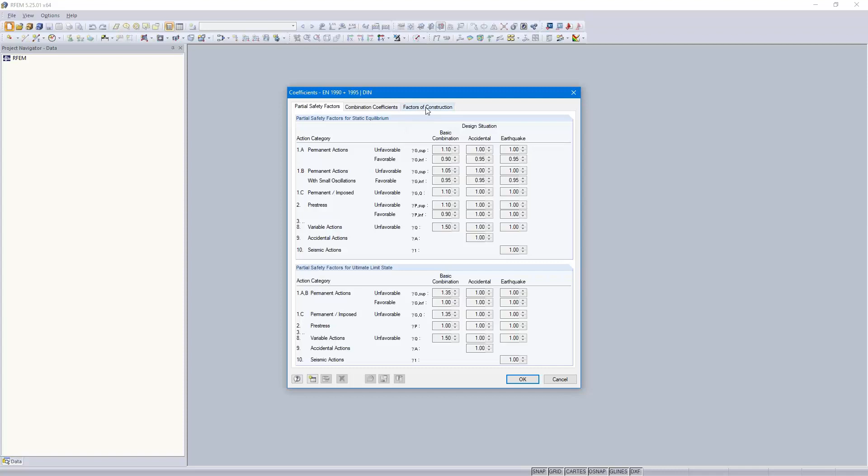Okay, then the national annex is here. I use the German standard, and I edited the settings of the national annex. It's a little bit hidden, but it's important for the combinations. Here you can choose the factors of construction, especially the KDEF factor.

And here with the button, the dialog opens, and I can choose service class 1 because our building is enclosed on all sides, and it's a heated building. The KDEF factor has been changed to 0.6 now.

Okay, that's all for this dialog.

So I changed the work plane to XZ here above, and the view in reverse Y direction. So I start with the first column here left above with a new single member, a beam, but I need to choose a cross section.

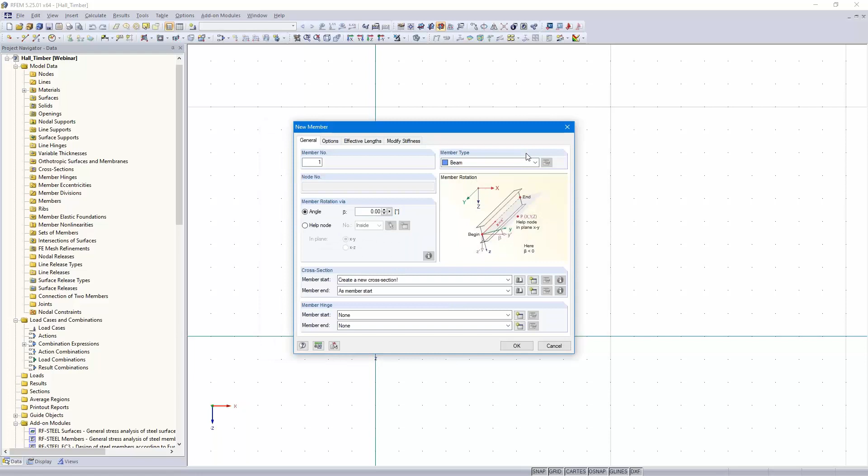I open the cross section library and choose a timber cross section. Dimensions are 160 by 700 millimeters. For the material, there's none assigned yet, so I open the library: timber, glulam, and I use DIN, glulam timber GL28C.

Okay, so that's all. Now I can enter the column. The height should be 5 meters, and I also model the beam, or the half of the beam.

So then I double click on the beam and add a member hinge at the start, a hinge around the Y and Z axis.

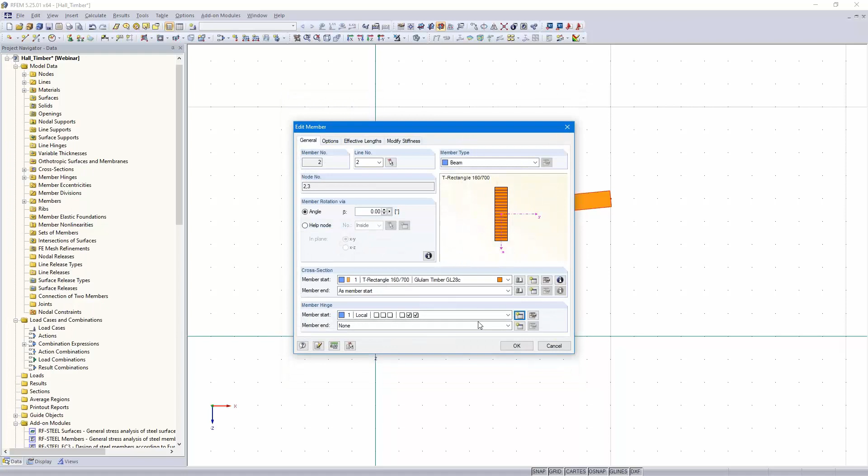And now I divide the beam in the middle, because later we will support the beam here at the edge, in the middle, and in the middle of the half of the beam. So I open the dialog with a right click, divide member and intermediate nodes, one node, and now it's divided exactly in the middle.

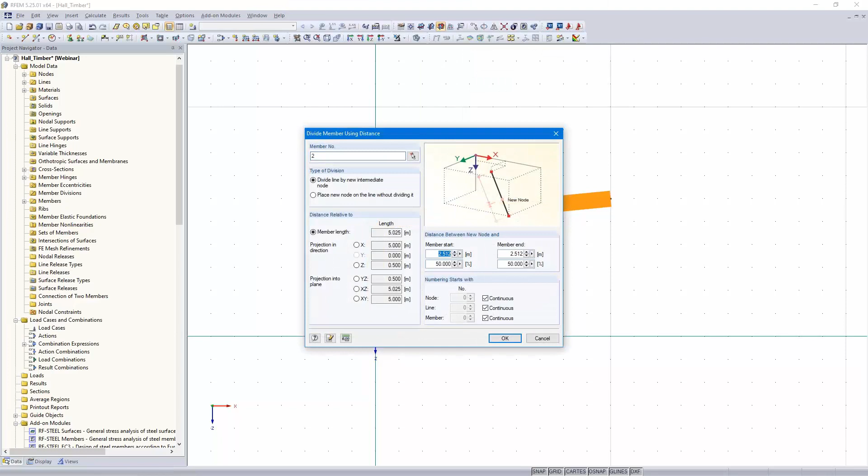So I divide the beam again, divide member by distance. Member start 1.5 meters, and I also divide the column 0.5 meters from the end.

Okay, and now I add the truss here: new single member, new cross section, 160 by 160 millimeters, but a new material.

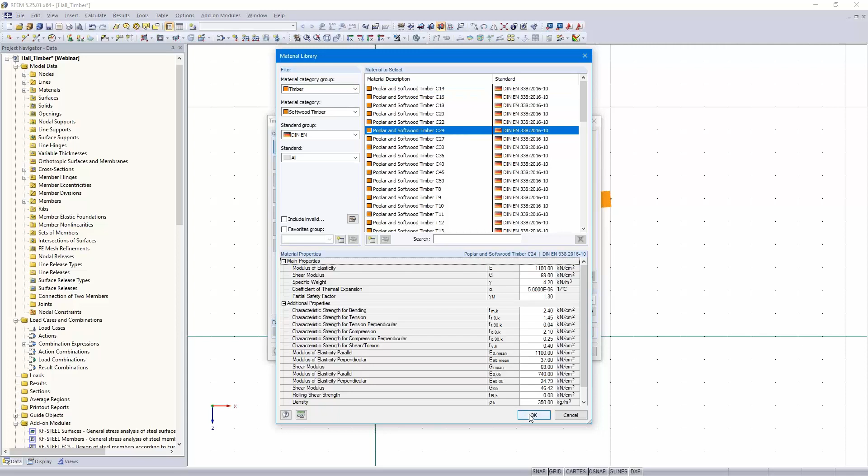Softwood timber, C24. Okay, truss, from this point to this point.

Yeah, and now it's a disconnected frame joint. So I add a support here, left above, new nodal support. Support in X, Y, and Z direction, and around the Z axis. Now it's a typical lateral and torsional restraint.

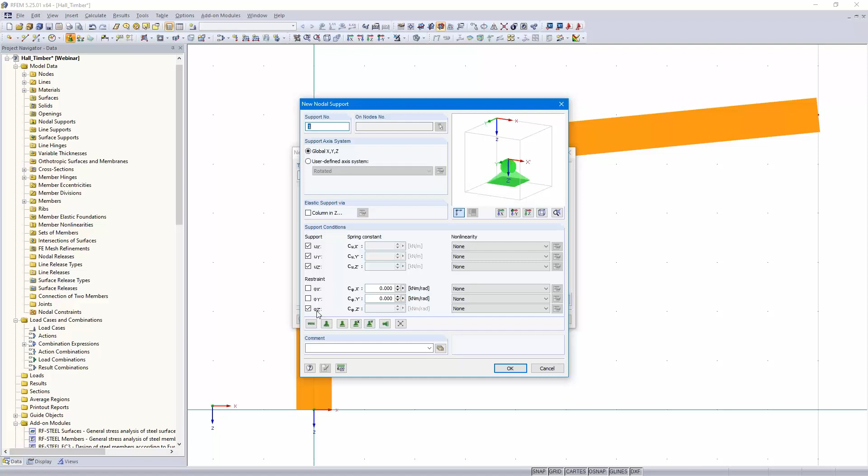So, and then I can mirror here, right above - mirror, create copy. The work plane should be the Y-Z axis, this axis here, but the point on the middle plane is here. Okay, so that's all.

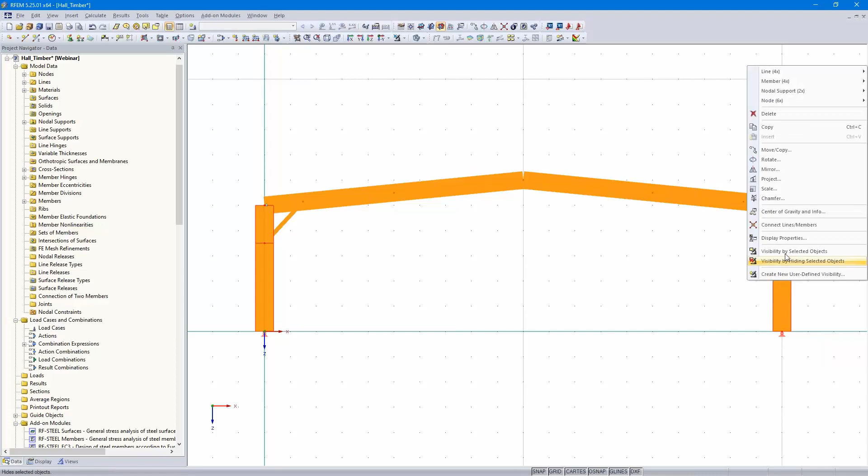Okay, then important for the design later: the columns are divided by the nodes, and also the beam. But for the design, we would like to consider the whole column and the whole beam. That's why I now define sets of members, starting with the columns. By right click, I open the context menu: member, create sets of members.

So I change to the wireframe model, and you can see by the dotted line here that it's a set of members now. Yeah, but I forgot to change the start and the end of the member.

With that option, reverse member orientation, you can change the member orientation. Now the start of the column is here, and that can be important when you create imperfections. I will create imperfections, and then it's important that the start of the column is at the bottom.

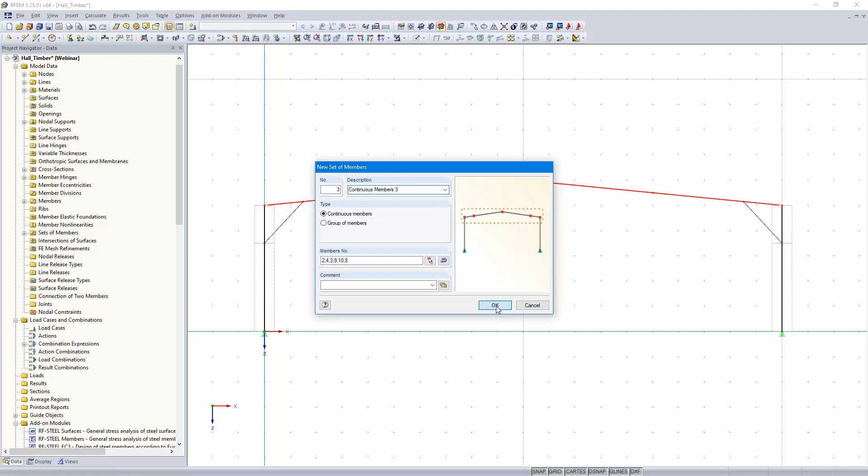Okay, new set of members. Right click, member, create set of member. So now the whole frame is modeled. I copy it one time.

4.5 meters. Okay, and now I create the coupling members at these points here, 5 times. So left above here, new single member,

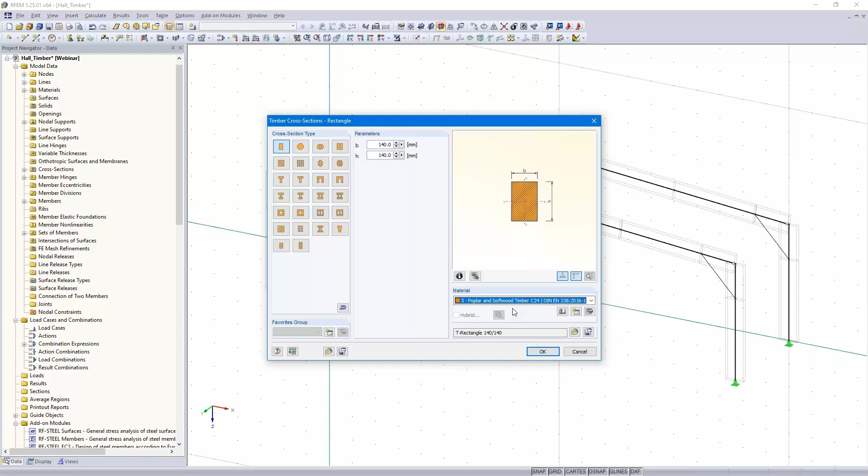new cross section, 140 by 140 millimeters. But this time, yeah, it's C24. Okay.

So 4 times and 5 times. Okay, that's all. Just let me check if I, yeah, okay, C24 was okay.

So now I switch to the solid display model. Since those are trusses, it doesn't matter how the angle is, but you can see here it's not the same angle on the upper side of the truss and the beam.

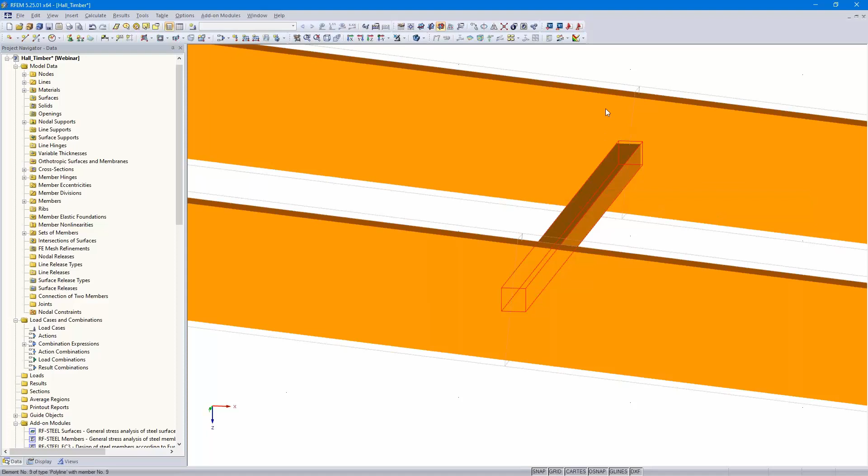As I said, it doesn't matter for the trusses, but imagine you have purlins, and you have the purlin here above - you must rotate the purlin. I would like to show you how to do that easily.

I select the 4 trusses here, then I double click, and here under options, general, I would like to define a help node in the XY plane, meaning that plane here, the cross section. I click at this point here, okay, and now the cross sections are rotated.

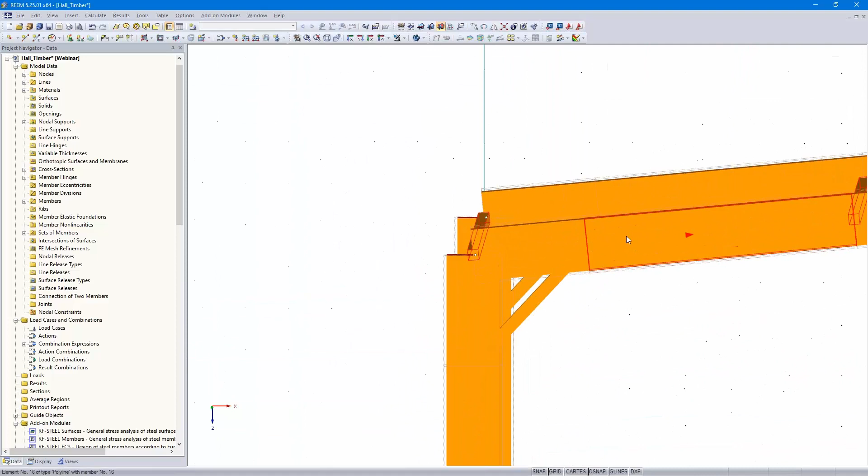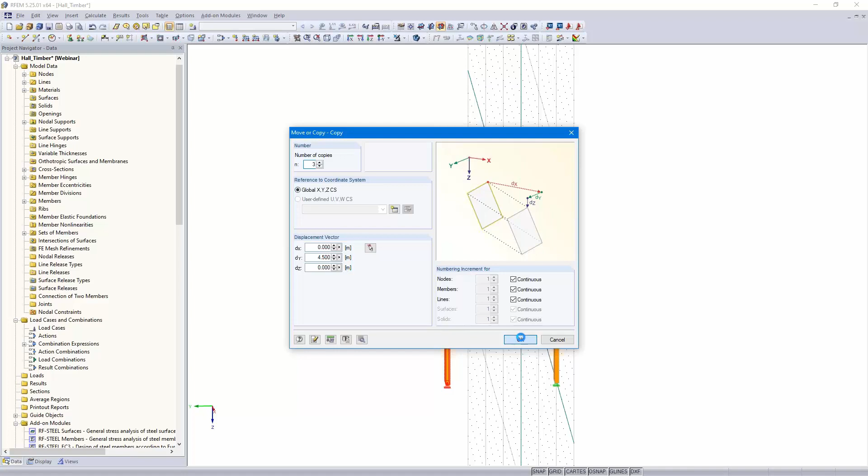This one, this one, this one, and this one. Okay, just a tip. Then I copy this again, the trusses and the frame, 3 times. So, okay.

The frames and the trusses are complete now, and I continue with the gable columns, 3 columns here. I do it this way.

I copy these nodes here, 1 time, 2 meters in Z direction, and I edit the expanded settings.

So I would like to create members between the original node and the copied node. And I define the cross section of the member - should be a beam, new cross section, 160 by 240 millimeters.

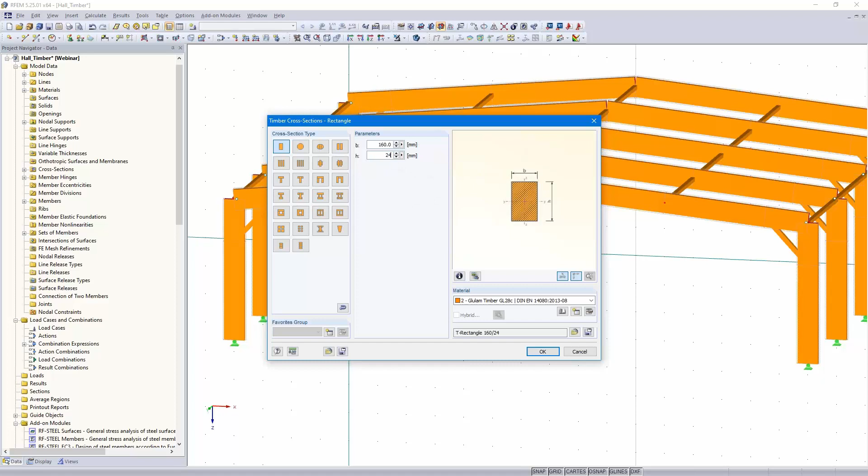Okay, and I rotate them 90 degrees. Okay, so now the orientation is correct, but now we are too short.

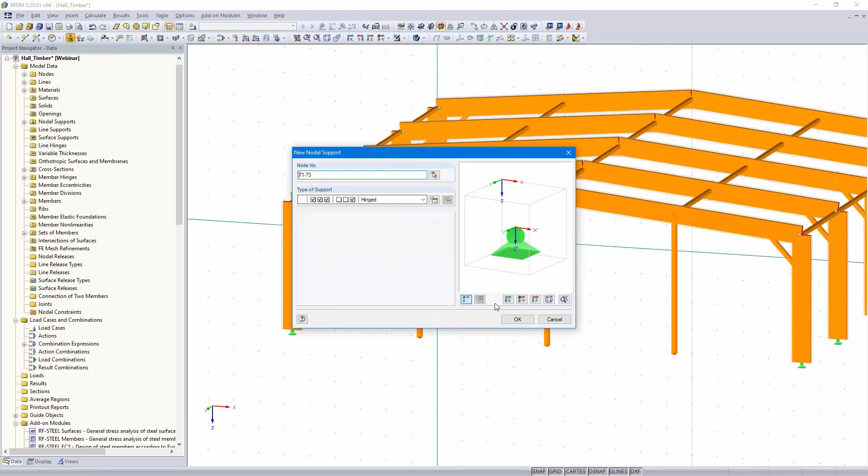So I double click, or I select 3 nodes and double click at 1 node and set 0 for the Z coordinate, and now we have the correct length. Height also support - the same supports as for the frame columns.

So the gable columns are almost complete, but I need to change the orientation here. By right click I open the context menu, then reverse member orientation. Okay, and now the start is here at the bottom.

So with double click I add a member end, a hinge at the member end, sorry. So hinge around Y and Z axis, and also a hinge in X direction. This means that a vertical load can't act on the column, but we can extend the hall at a later time.

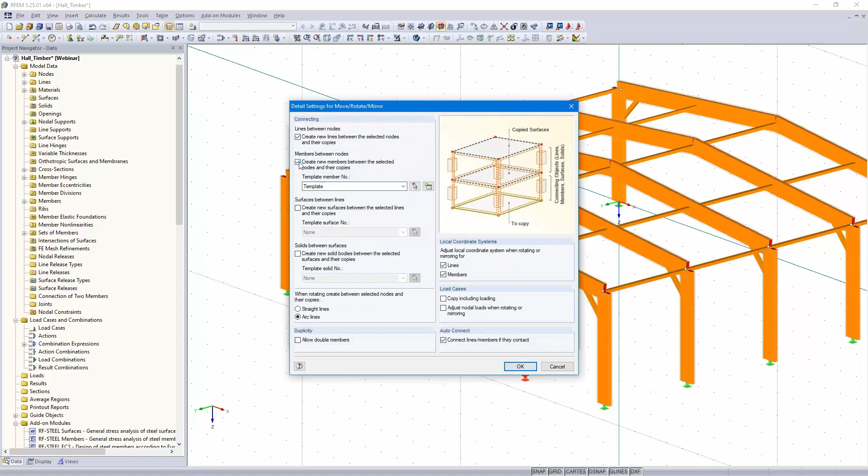Okay, I copy the 3 gable columns. I need to uncheck that option here. Okay. Then from here to there. Okay.

So then I divide all the columns here. Member, divide by distance, 0.5 meter. Okay.

Yeah, and that is the point where the platform is located. Okay, I select only the short columns, and let me show you only these columns.

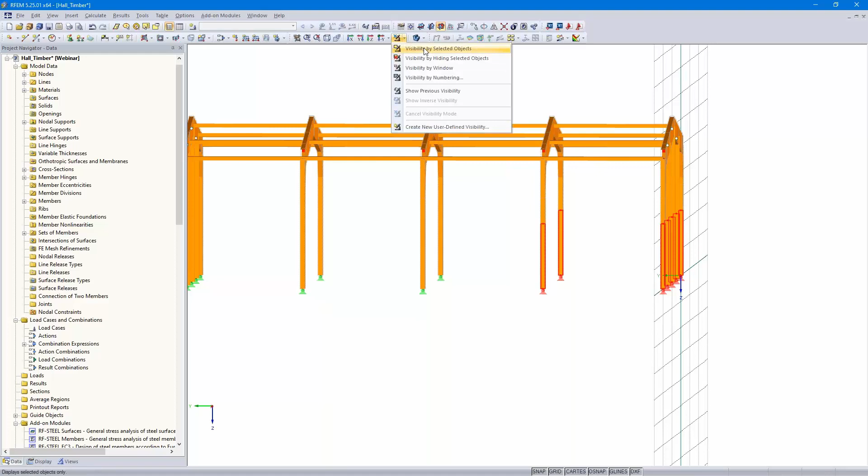So, and I can now see the hidden structure is still visible in a gray color, and I can hide them completely, the beams and so on. In the project navigator display, there is the option show hidden objects in background, and I uncheck this.

Okay, now we can only see these columns here. So I copy them here one time, from here to there, 5.4 meters. Okay.

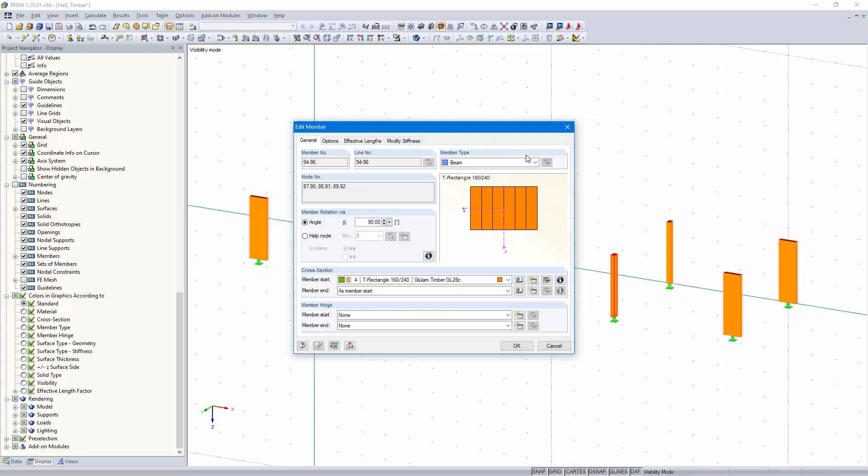So, and now I change the cross section here for these columns. So, 140 by 140, and C24.

Okay, I have to check if the gable columns - they are glulam timber. Not a problem, I will change that. It's possible to change anything at any point.

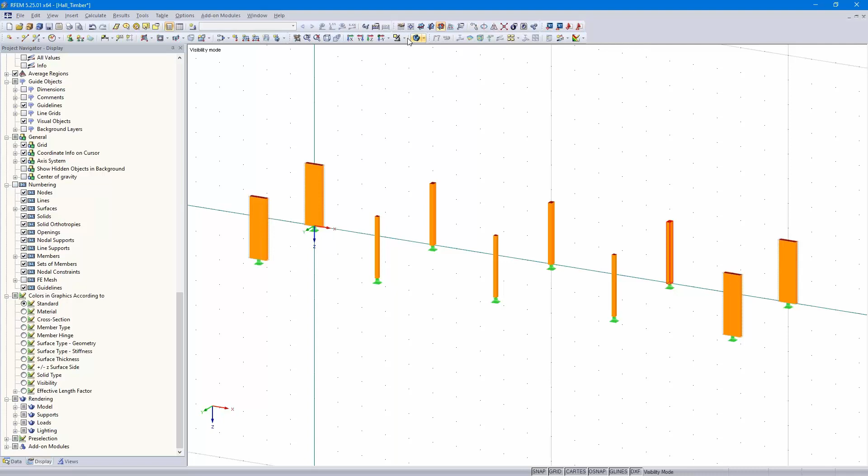I cancel the visibility mode, and I select all the columns. I can also do that by using the views navigator, members by cross-section, and those are the gable columns, and then I can change the material.

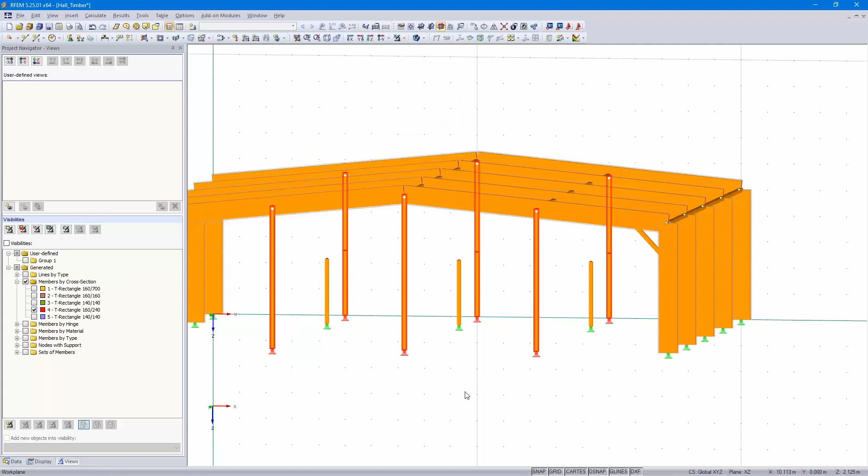To softwood timber C24. Okay, so I cancel the visibility mode, yeah, and I create the next visibility. So, okay.

Then I continue with the horizontal beams for the platform. New single member. New cross-section.

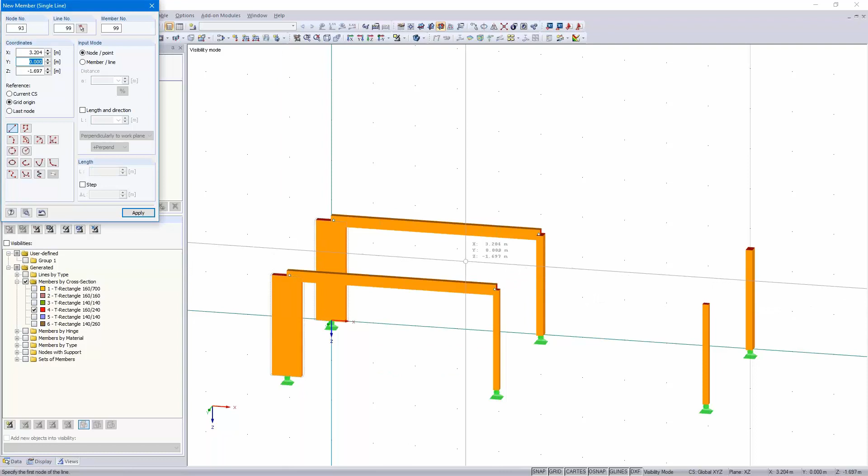140 by 260 millimeter, C24. Okay, and hinges at the start and the end, from this node to this node, and this node to this node. So, since this is the same distance, I can copy them three times.

From here to there is the vector, 5 meters. Okay.

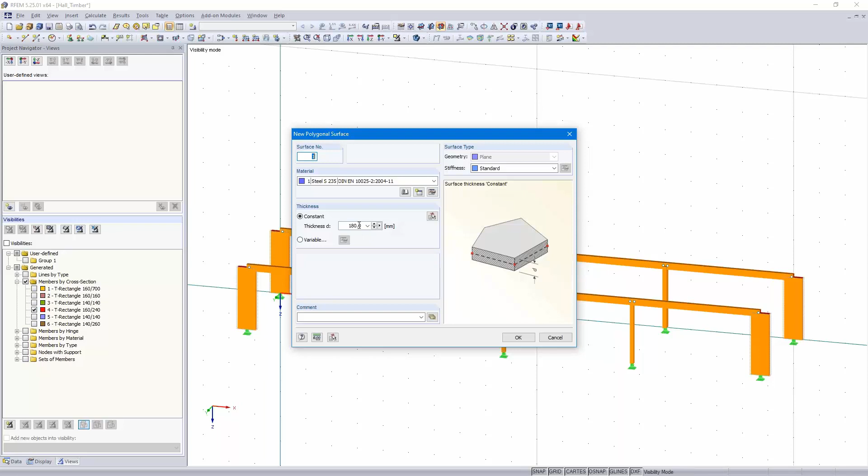So then the next is the surface of the platform. It should be a CLT panel or CLT plate. I open the dialog here. I need to define the material and the thickness. I can enter anything here because I will change it later in the RFEM add-on module RF-LAMINATE. I can enter here 180 millimeters steel. We will change that later.

So, from this point to this and this one. Okay. So, that's the surface of the platform.

And I will move the beams here on the lower side of the plate with an eccentricity. So how to do that?

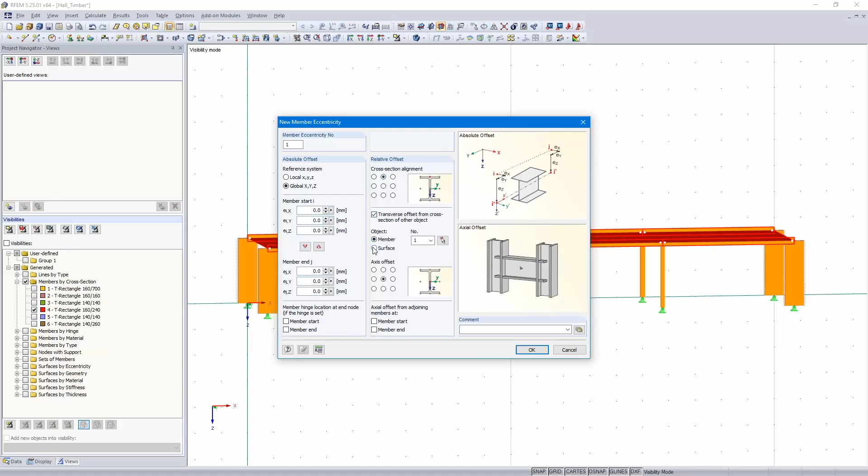I select all and then double click on one member, and then under options you will find the option member eccentricity. I create a new member eccentricity, a relative offset. The upper side of the beam should be on the lower side of the surface. Surface number 1, it's only one surface. Okay.

So, and now the members have been moved, as you can see.

So, now we change the settings of the surface with the help of the add-on module RF-LAMINATE. Here under add-on modules, others, you can find the add-on module RF-LAMINATE. There's an error message, no action has been defined. It's necessary to define a load case at least because it's a design program for laminated surfaces of RF-LAMINATE add-on module. That's why I press cancel here.

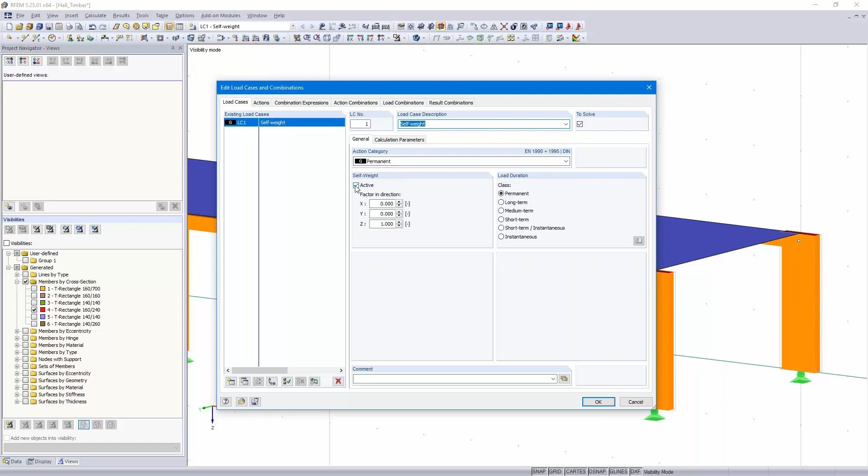I enter at least one load case. Load case number 1, self-weight, permanent, and the self-weight is active. Okay.

Then I open the add-on module again, and as you could see, the first load combinations have been created. Now only a few load combinations because we have got only one load case. Later we will have more of them. So I select here the ultimate limit state combination.

Surfaces, now all surfaces, we have got only one surface. And I use the European standard. As you can see here, all the American and Canadian standards are implemented. So European standard, and I use the German national annex.

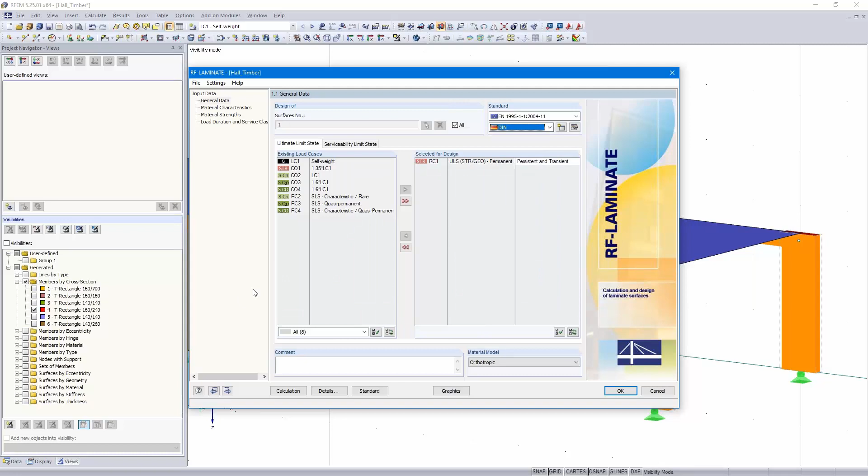So then next dialog, I call it slab. The surface is only this surface, and I can enter here materials and thicknesses and so on, but I use the option to import layers from a library. We've got a large library here with different producers. In our webinar I used the KLH producer and plate with a thickness of 220 millimeters.

Okay, that's the thickness of the single layer and the orthotropy direction. Is that the correct one? No, I would like to use this one. Okay.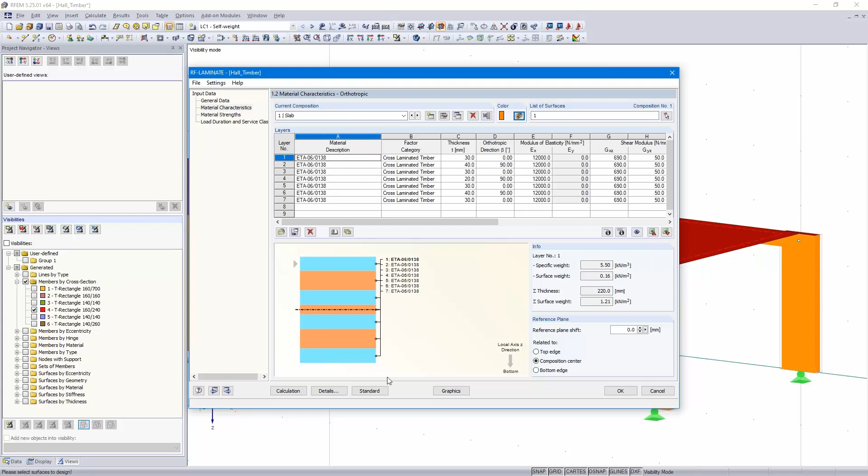Also the stiffness reduction factors are here. Okay, and now you can see here thicknesses and so on. I would like to change the color from blue to a typical timber color. Okay, that's all what I need to do in the program of Laminate. Next week, Bastian Kuhn will design the plate here in this add-on module.

Okay, as you could see, the members are moved again in the Z direction. I can show you in the display navigator here under model, solid model, surfaces, the surfaces with, also including thickness, and you can see the member eccentricity has been changed and it's correct. So I use the fitted option because the program calculates with the axis of the members and the axis of the shells and plates and slabs and so on.

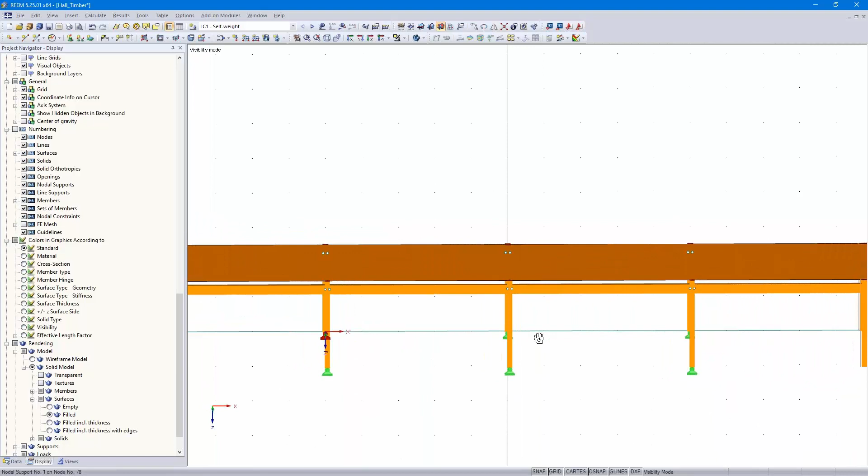Okay, then we turn to the next point. I would like to divide the slab here in this axis. I create a line, so three times.

So, and I would like to define line hinges in these lines here. Okay, how to do that? Here left above, insert, model data, line hinges.

I assign the line hinges graphically. But first I need to define the settings of the line hinge. I would like to consider spring constants, 7,700 kilonewton per square meter. That's a typical spring constant for connection, and it depends on the connection of the plates.

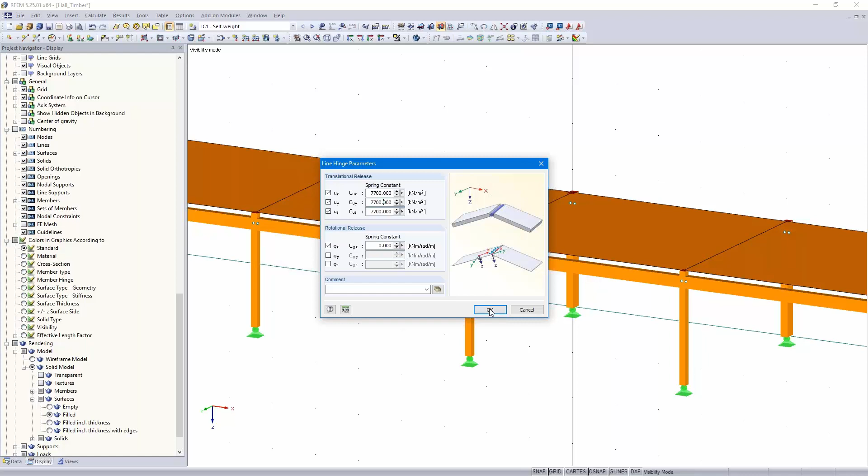So, and rotational release around the x-axis, near the axis of the line. Okay. Then I need to select the surface and the single lines. Okay, and now you can see the line hinges are created here.

So, and between the surface and the beams, I would like to create also a connection, a similar connection, and I need to define line releases. So model data and then line releases. Okay, which line? I start with this line. I need to define it eight times for all the horizontal beams here.

So then I need to define the line release type. So 7700, the same settings. And also around the x-axis. Okay, that's the same release type as for the line hinges.

So surface number 1, it's clear. Okay. So the first line release is created, and with enter I can go back to the function, next line, and surface number 1. Okay. So and then I go on with the same workflow. With enter I go back to the dialog and enter the same values. So enter.

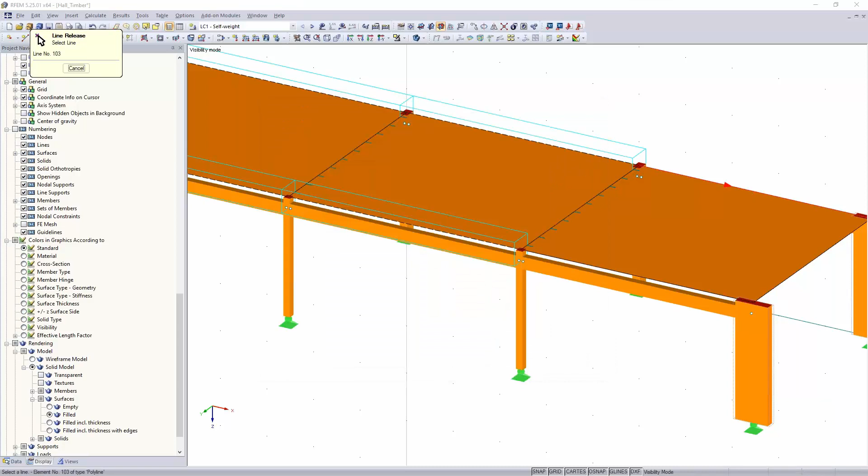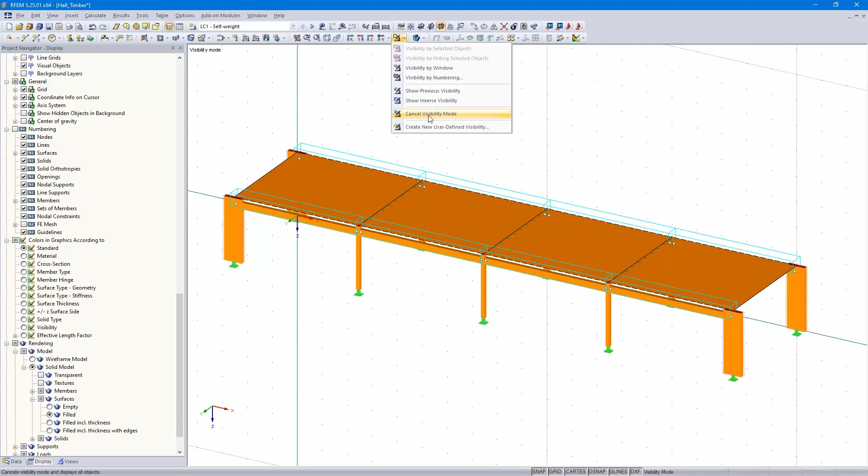So, almost complete. So the last one. Okay, all line releases have been created. Okay, then I cancel the visibility mode. So the hall is almost complete. We only need to define bracings.

I start with the wall bracings. I change to the wireframe model. Left above here, new single member, this time a tension member. And I need to define a new cross section, and on the left side, solid sections. And I use a round 16.

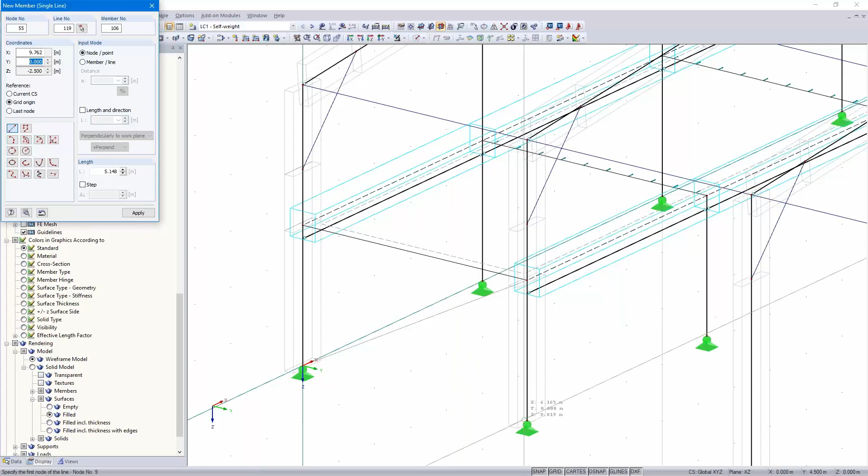S235 is correct. Okay. So then from here to there. As you can see, there are 2 nodes, one original node and one generated from the line release, but they are at the same place. I use the original node. So, same here.

Okay, and then the bracings on the roof.

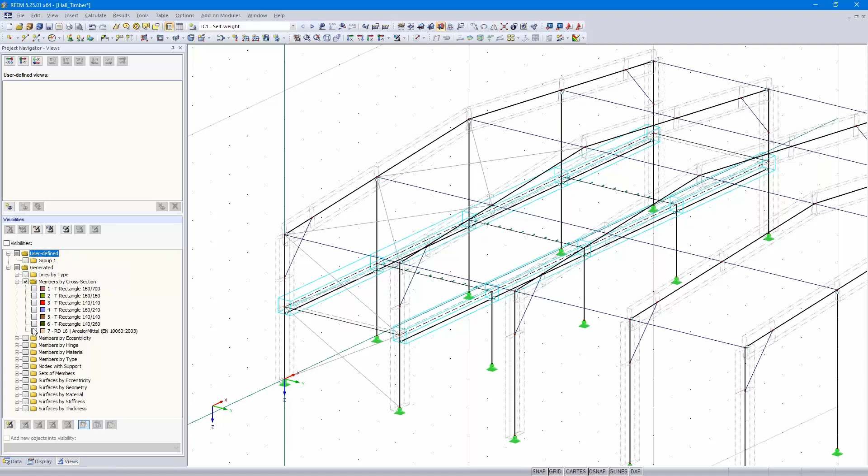Oh, and I mirror the other side, or I mirror this side from here to there. So how to do that? I go to the project navigator views, and I select only the round 16. Then I select all, the mirror function here, create copy, YZ plane, and this point here is in the plane. Okay.

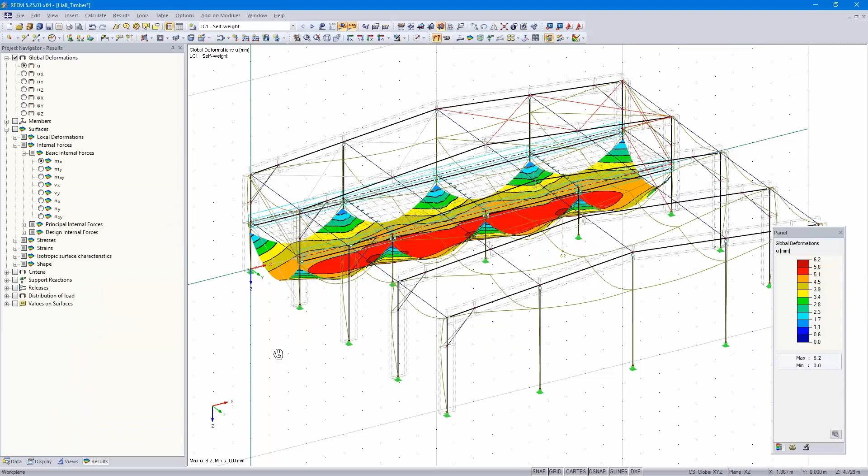So now the model is complete. So I calculate the self-weight load case to check if I modeled everything correctly. Okay, that works. The deformation is a little bit higher than in my test. Oh, I will check that.

Okay, then I need to check if the axis of the surface is correct. As you can see, the x-axis is here in this direction, but I would like to have the x-axis, the strong axis, from beam to beam. So that's why I double-click on the surface. Now just remember the value here, 6.2. I double-click and then here, axis, and I rotate it 90 degrees.

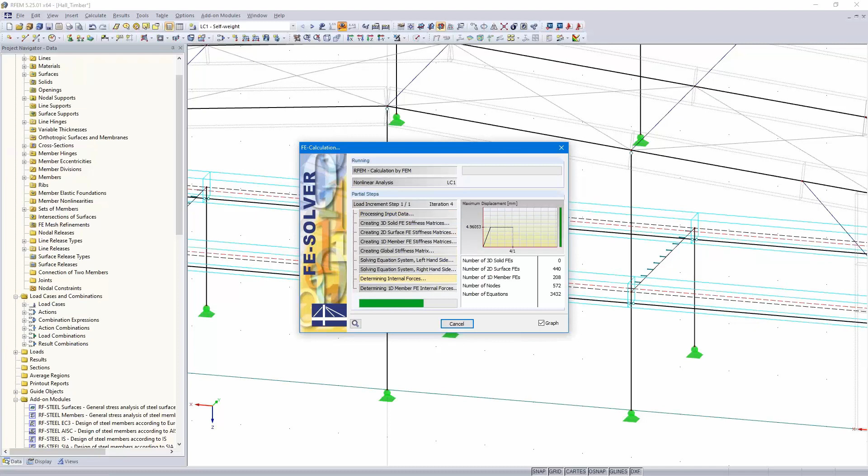Okay. I need to select only the platform here. So then now it's 5 millimeters, and if I press undo, okay, calculate all.

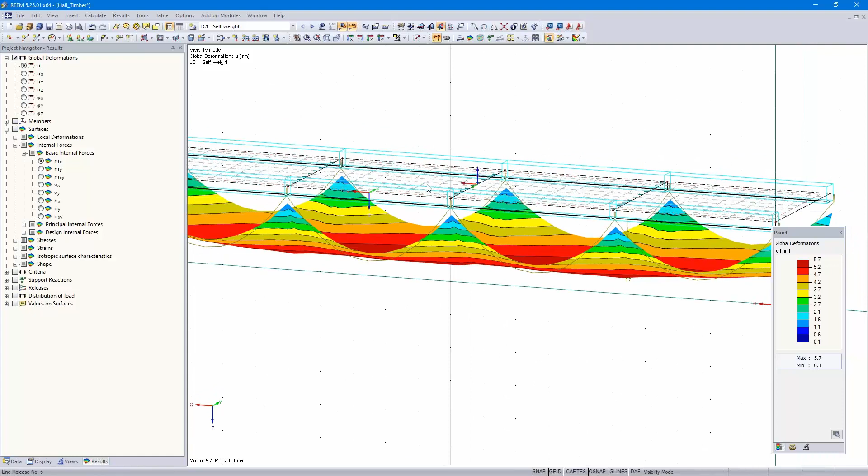Yeah, it was 5.7. Then I changed the axis. I can't redo, okay, I must do it again. 90 degrees, okay. And now the deformation should be lower. Yeah, 5 millimeters. Okay, that's correct.

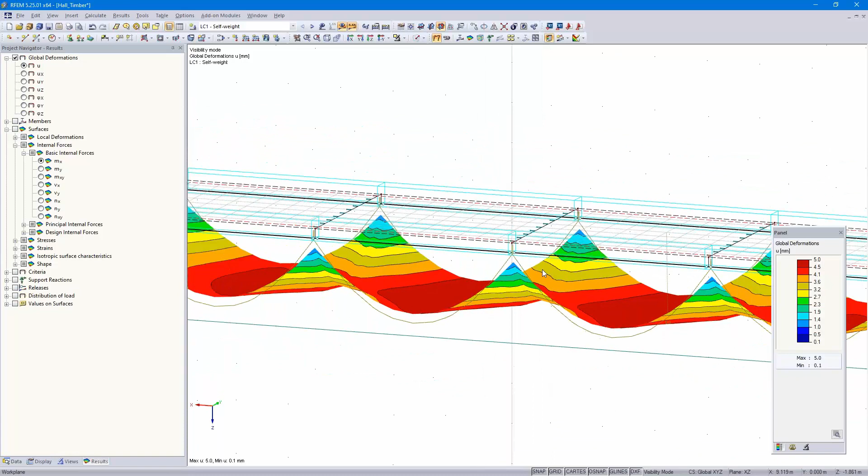So I cancel the visibility mode and turn to the solid display model. Yeah, that was the first point of the webinar, the modeling of the structure. And now we turn to the next point of the webinar, the loading. I start with the self-weight load case.

With the tool, generate loads from area loads on member via plane, I will enter the load on the roof. The magnitude is 0.5 kilonewton per square meter. And as you can see, the graphic of the load isn't correct. I need to change it to ZL. That's the correct display of the self-weight load.

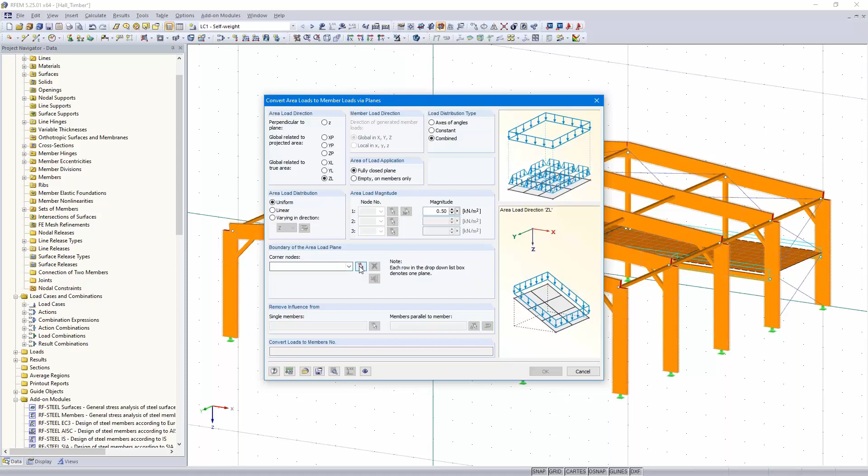Okay, then I need to define the plane of the load. I change to the wireframe model again to select the single nodes. Okay, first plane and second plane. Okay, that's all.

And I would like to remove members from the loading, the trusses. The load should also be applied to the beams. Okay. So the load is created and I can show you by display separately the load on the beams. And the intelligence is still there.

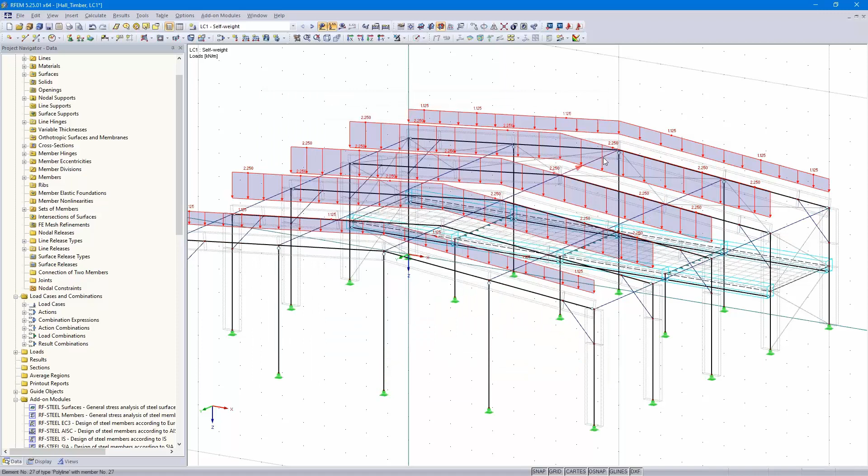If I change anything here, the load in the plane, the member loads are changing automatically. So you will see that when I copy the load case here in this dialog, copy the load case and call it snow.

Change the action category to snow, disable or uncheck the self-weight. Okay, and now I change the load. Here I need to select the ZP, projected area. That's the correct display of the snow load. The rest is okay, but the magnitude must be changed. What is the value of the snow load?

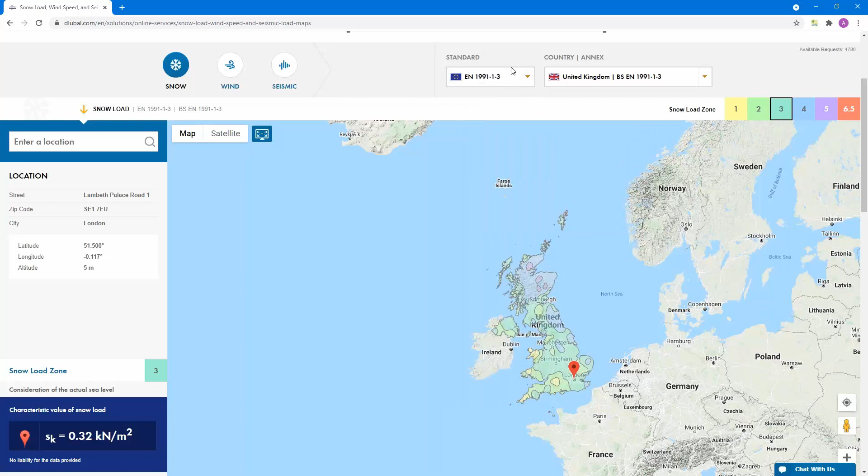I use the tool on our website. Here under solutions you can find the snow load, wind speed and seismic load maps of a lot of countries. And if I check here Eurocode, a lot of countries in Europe. I use Germany and I search for our office in Leipzig. Okay.

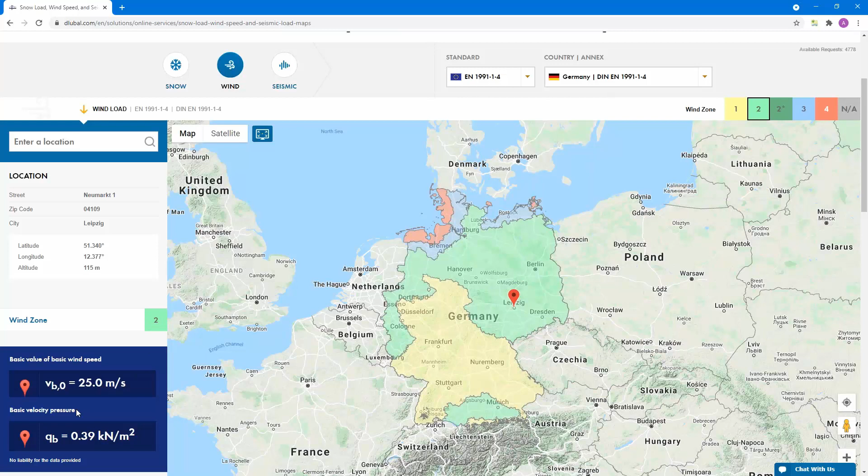So, as you can see here, the altitude is 115 meters. Snow load zone is 2. Wind zone is 2 as well. And no seismic zone. And if you press here on this button, print, you can print all the results with one click. Snow load, wind load, wind zone, altitude, and so on.

First we need this load, 0.85 kilonewton per square meter, and I need to multiply that by 0.8, and the result is 0.68. That's what I enter here, 0.68, and the load has been changed. Okay, snow load case is finished.

We continue with the wind load cases. Before I do that, I turn to the PowerPoint.

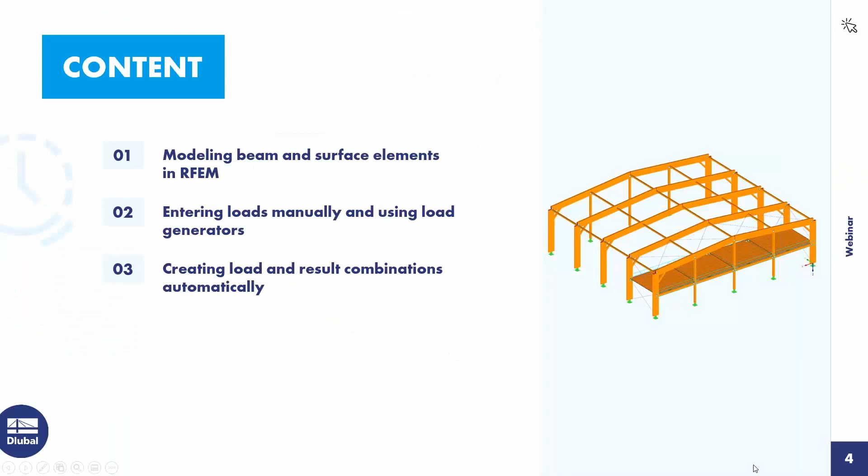For dual pitch roofs, we also need to apply wind direction 90 degrees, this load case with suction. And if it's not symmetrical, as our hall is - we have a platform on one side but not on the other - I need to apply another load case with minus 90 degrees. That's why we need to enter 6 wind load cases. I will start with the 4 wind load cases in wind direction 0 degrees.

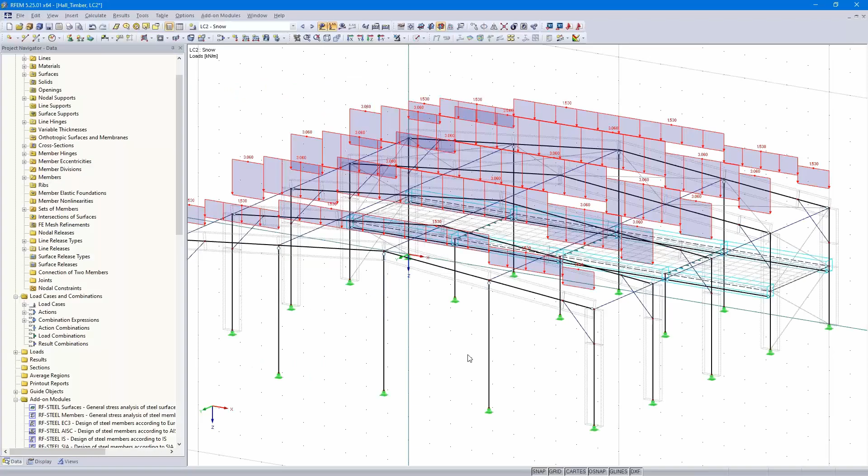New wind load case, wind in plus X with pressure. I copy that, then with suction, and pressure, and pressure and suction. These are the 4 wind load cases for wind direction 0 degrees.

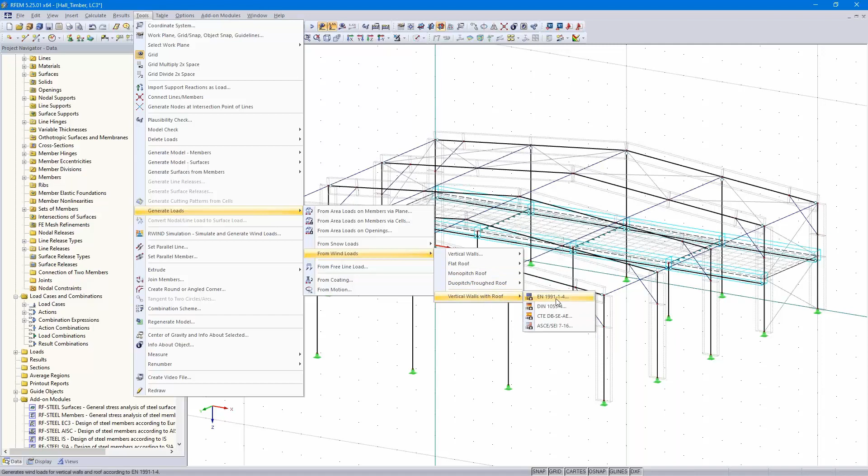So I use another tool here under Tools, generate loads, and from wind loads you can define it for vertical walls, roofs, and walls with roof. I use this feature here, according to Eurocode. I use the German National Annex. The wind zone was 2.

I can turn back to the website or to the PDF that I would like to print. Wind zone 2, and the altitude is 115 meters. So wind zone 2, the terrain category is 3, 115 meters, and the structure height I can measure it here from here to here - 6 meters.

Then I need to define the base geometry for nodes, and the roof geometry for a dual pitch roof. Okay, it's done.

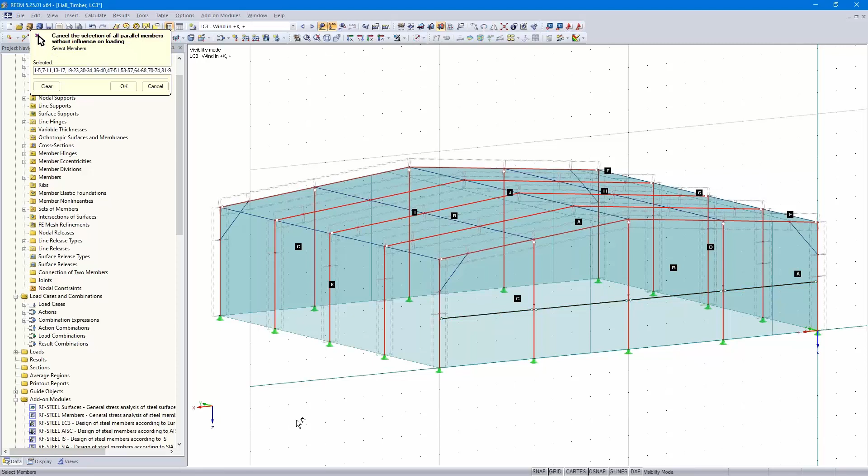Load case number 3, the pressure on the roof, suction. Load case 5 with suction and pressure, and load case 6 with pressure and suction. So then I need to remove some members from the loading - again the trusses, and also these trusses here, and the horizontal beams on the platform. That's all.

And all loads are created automatically. I can also display the surface loads. 4 wind load cases have been created, so I can show you.

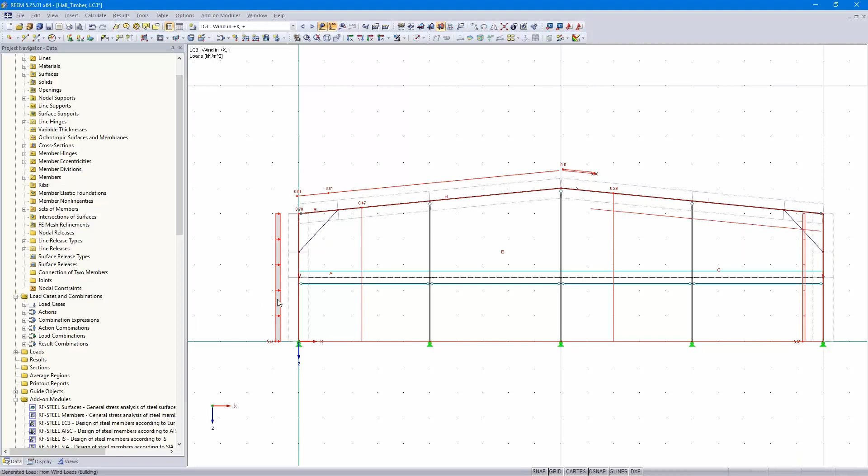Wind load case combinations are created automatically. The load on the walls is the same for all 4 wind load cases, but wind load case 3 is pressure and pressure, 4 is suction-suction, suction and pressure, and pressure and suction.

So then we copy wind load case number 3 one time - plus Y and minus with suction - and I copy it again, minus Y and suction.

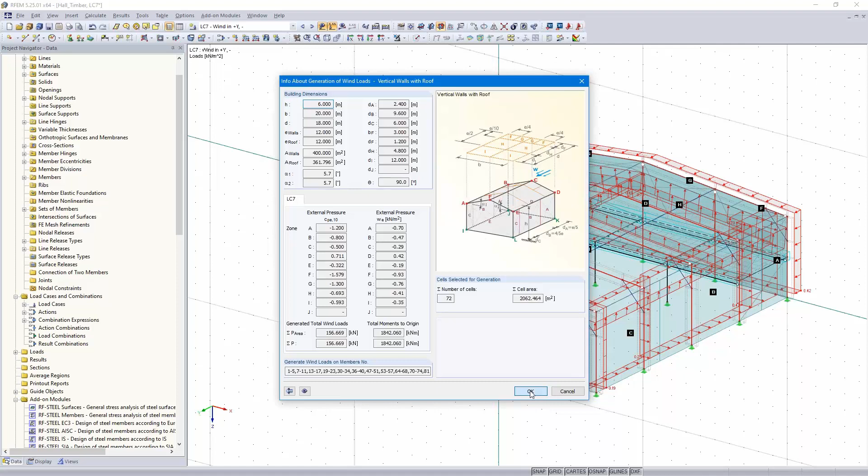So now I only need to change the parameters here by double click. I only need to change the direction from this side, B, C, D, and assign the load case number 7, suction, and I press OK, and all loads have been changed from this side, plus Y direction.

So load case number 8, double click, direction now from here, E, F, A, from this side, and load case number 8 with the suction. Okay, now from this side here.

You could see what is necessary to define 6 wind load cases for such a structure. I think it's quite easy with the software, with this tool. Just imagine you need to do that by hand - it would take more than 1 hour or several hours.

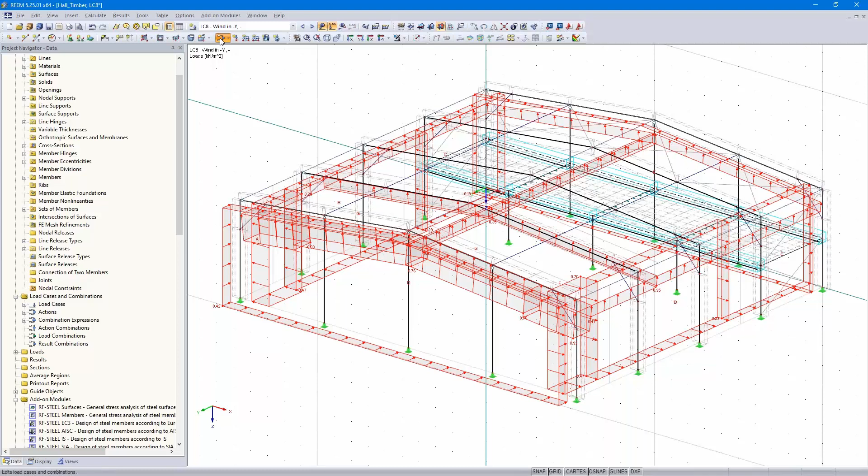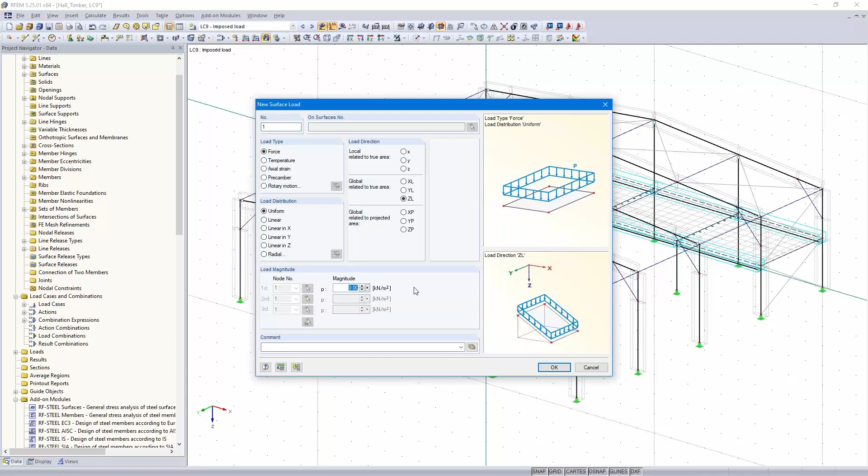Okay, we continue with the imposed load case. New load case, imposed load, that's the correct action category. As you could see, the load duration has been changed automatically. This is only one load here, new surface load, 2.5 kilonewton per square meter.

That was quite easy, and the last part of the loads are the imperfections. New load case, imperfection towards plus X. I would like to define 3 imperfection load cases in the same direction as the wind load cases act. Towards X, that's okay.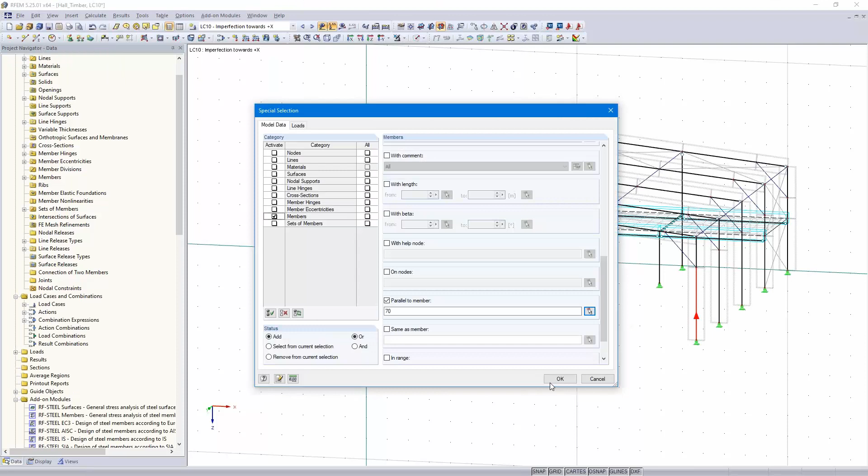I would like to apply the imperfections on the columns, that's why I select only the columns. Here left above, there's an option select special - on the left side I select members, then scroll down here, parallel to member, and I select any column. So now only the columns are selected. Then I press here, visibility by selected objects, and only the columns are displayed.

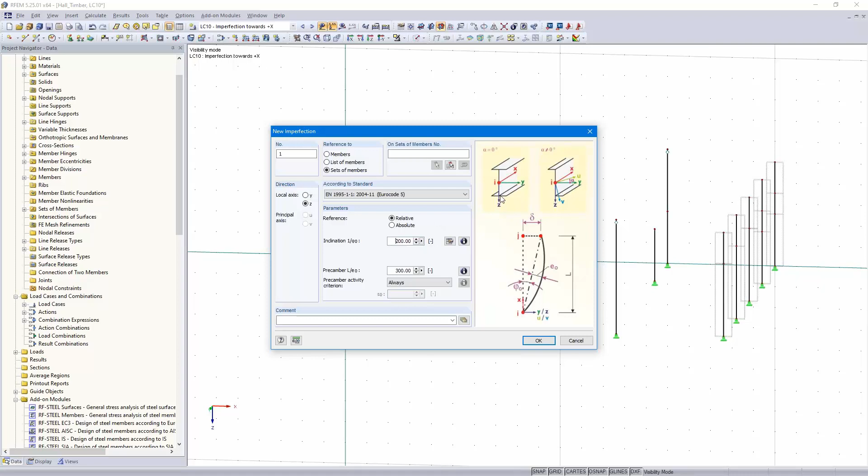Then insert, left above, loads, imperfections, dialog box. There are 3 options to define the imperfections on members - list of members, and sets of members. I show all 3 options, starting with the sets of members according to Eurocode 5. I leave these parameters here. In set direction, strong axis of the members, and I select all the sets of members.

The direction is okay. To define it correctly, you can search for help here with the display navigator - you can select for the members the member axis systems, and now you can see here the member axis systems. So plus Z is here, that's why the imperfection is defined correctly.

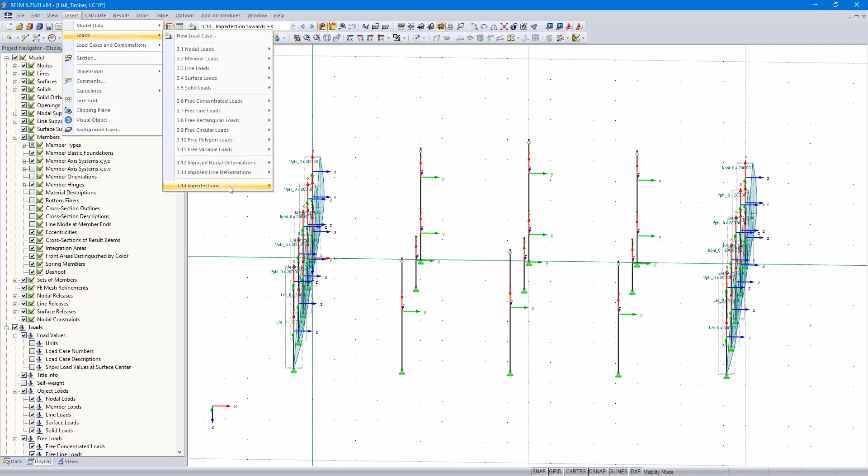So we continue with the inner columns - same dialog, insert, loads, imperfections, members, and now in Y direction. You can see here the green arrow, that's the Y-axis. Members, all members. Okay.

So you can see the imperfections are correct, but not for the gable columns here, because they are divided by a node due to the platform. That's why they are incorrect.

One possibility would be to define sets of members, but I would like to show you the third option: insert, loads, imperfections, and now list of members.

In Y direction, these two members, okay. I turn back to the dialog with enter, list of members, okay, enter, okay.

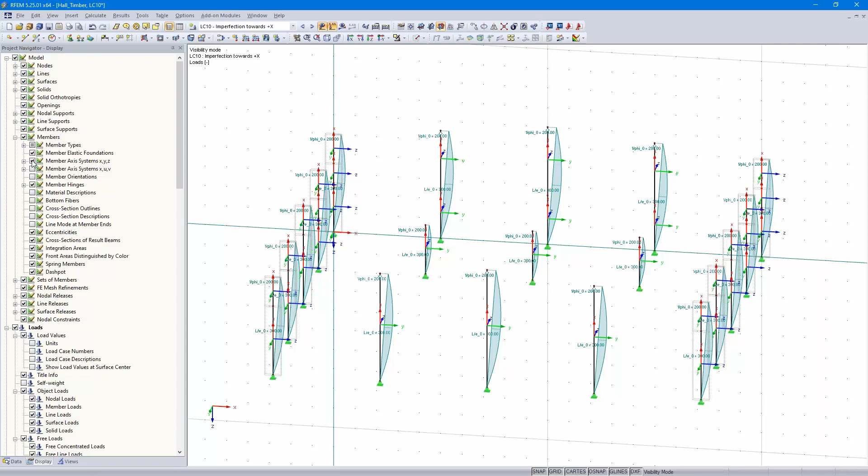So all wind load cases are created now. I uncheck here member axis systems, so I cancel the visibility mode, and we can go through all the load cases.

So self-weight, snow, I can show the loads on the members. Snow, the 4 wind load cases in X direction plus Y direction minus Y direction, the imposed load, imperfections in X direction. Oh, that was.

I forgot to continue with the imperfections. Okay, I copy the imperfection and now in Y direction.

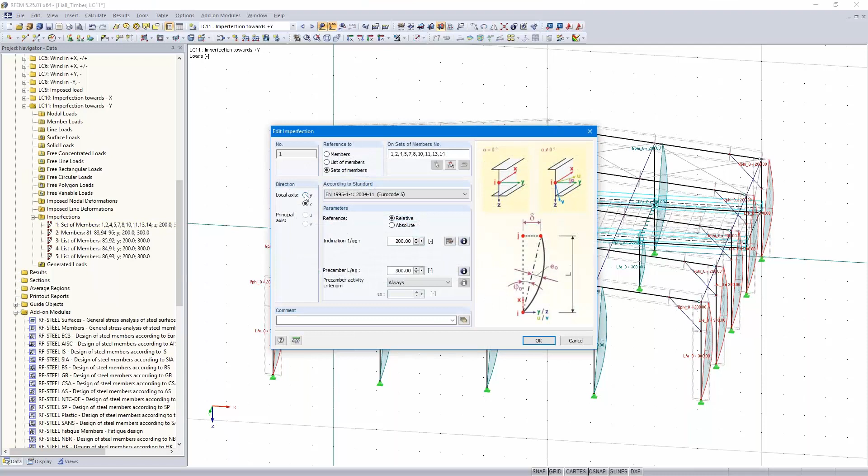Okay, and now I only need to modify the loads. I go to the data navigator, and then under loads you will find the load cases. Then here the load case number 11, plus Y, and then here are the imperfections. Then I double click here, change it to Y direction. Okay, that's correct.

I need to show the member axis systems. Okay. And I can turn back to the previous visibility. So then the members, now in minus Z direction.

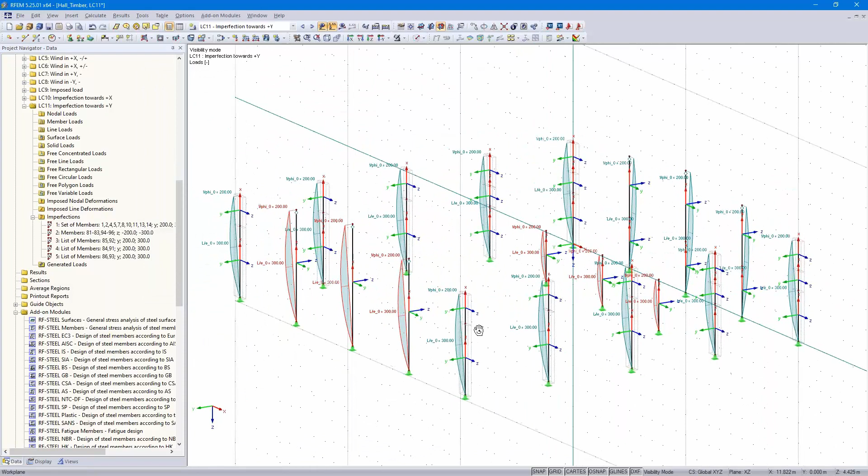Here I change it to Z, and here minus. Okay. So then these 3 imperfections, I select all of them, double click, then in Z and minus Z direction. Okay.

So now the last imperfection, I copy it again, minus Y. Okay, and I only need to change the signs. Minus, minus, okay. Plus, plus, okay.

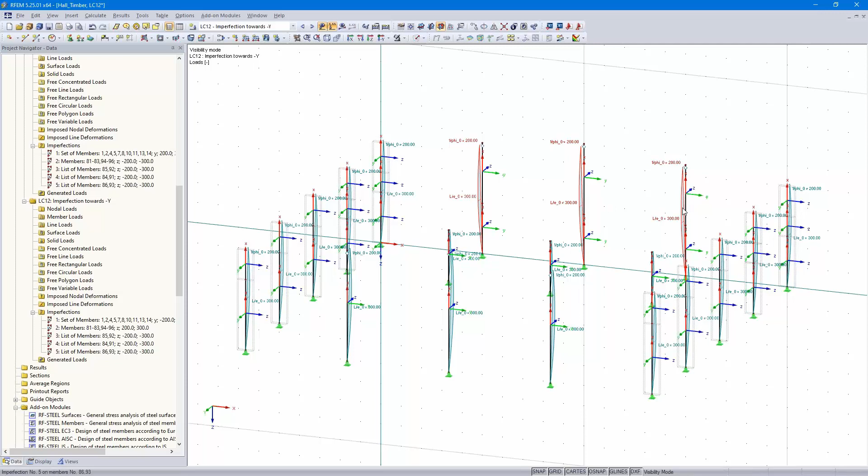And these three imperfections, double click, plus, plus. Okay, now also these two imperfections are correct. So cancel the visibility mode, then cancel the display of the axis systems. Okay, now we are complete, as the hall is complete and the loads are complete.

And we turn to the last point of the webinar, the combinatorics. It's only a short part. I open the dialog again here, edit the load cases and combinations.

Here are the load cases, the actions: permanent, snow, wind. The wind load cases act alternatively than the imposed load, and then under combination expressions you can see here the ultimate limit state, serviceability limit states, the three ones.

So I define here that the imperfections act with the loads. I select here subject to specific load cases, and I would like to create or apply the imperfections towards X, not with the wind load cases in Y direction. And the imperfections in Y direction, not with the wind load cases in X direction, and also not minus Y. And similar here.

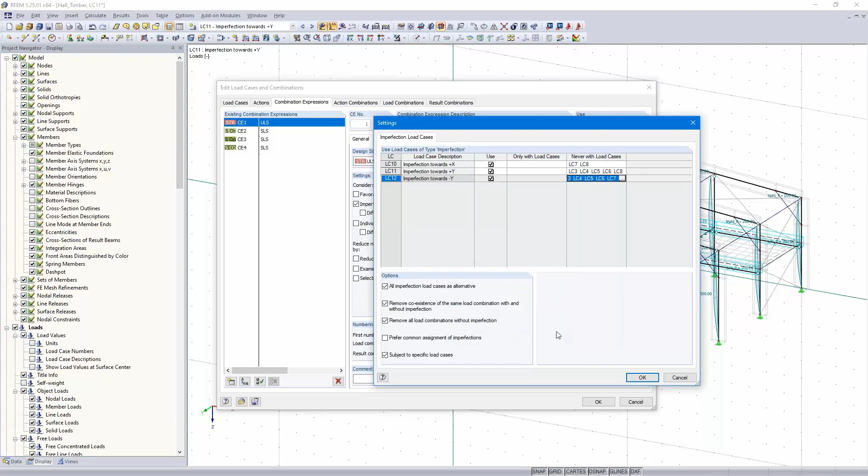Okay, that's all. And I select here differently for each combination expression, because I don't want to apply the imperfections to the serviceability load combinations. Okay, then the action combinations are created and the load combinations.

171 load combinations, and 4 result combinations: 1 for the ultimate limit state design and 3 for the serviceability limit state design. Okay, that's all in the program.